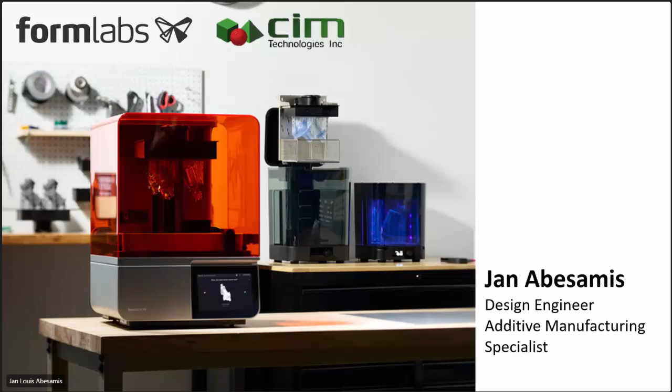So yan, kita naman na sir, no? Yes. So yan, so si Form 4, skip ko lang yung first two slides ko kasi we're all familiar what is 3D printing is.

So ito, si Form, sabi mo familiar ka kay Creality. FDM yung Creality niya sir o meron kayong Creality na SLA din? Yung regular lang na Creality, yung may filament. So Creality 3D printers you have is yung filament-based na 3D printer, it uses filament and hot extrusion.

In terms of AM, andun sila sa less precise and less accurate na printing. More on visual or tactile na object unless ma-calibrate mo siya to the point na makakuha ka ng accurate at precise na printouts. Pero with us, with Forms, nagfo-focus kami dito sa resin printing, photopolymerization.

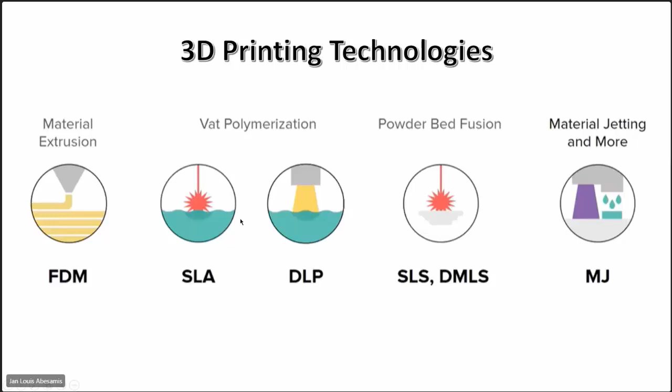So right now, si Form 4 is a technology advancement na combination nitong dalawa, SLA and DLP. Before kasi, si SLA, it uses single laser to form yung per layer niya. Then DLP, same way, like projector type, katulad ng mga projector na ginagamit natin sa presentation. Pero right now, si Form 4, it's a combination of two. Marami na siyang LED, tinatawag na siyang MSLA to create yung per layer niya. So much faster and much precise na yung printing.

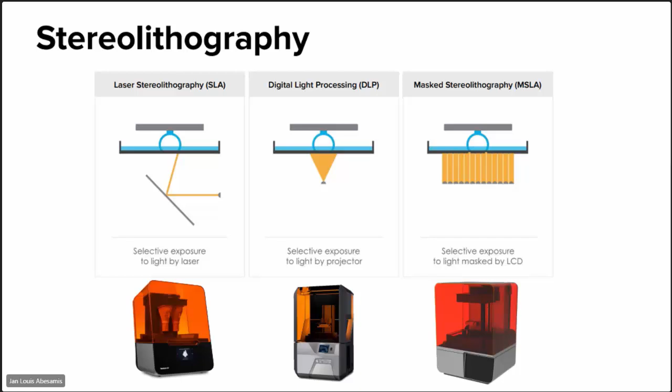So ang ginagawa namin right now with Formlabs at with other 3D printers, kasi ang nagiging marketing strategy ng other market, pag sinabi nilang high resolution, yung nag-research ka na, yung 12K, 8K na LCD, mas maganda, mas precise, which is not naman. It's a combination of two lagi, meron laging kaakibat siya. Pero in terms of TV, syempre, mas maganda yung 12K, 8K. Pero in 3D printing, hindi.

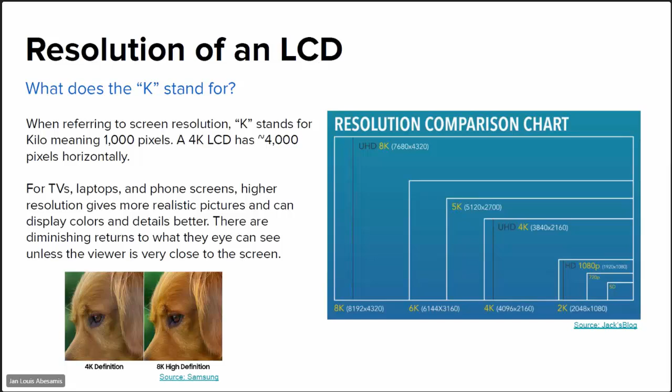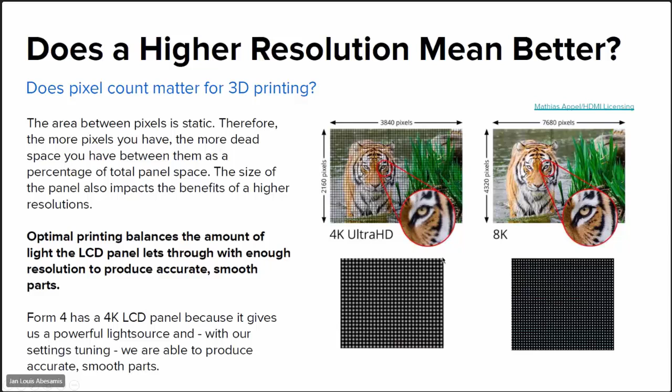Kailangan kabisado mo yung physical dimension din nung LCD na ginamit. For example, same dimension in XY, pero yung isa 8K, yung iba 4K. Kung mapapansin mo, in 8K, maraming block. Nakaka-affect yan dun sa magiging precision and accuracy ng printouts mo. So may expose yung layer mo. Unlike with a good combination of physical dimension and resolution, mas magpa-pass through yung ilaw, mas na-cure at mas na-expose yung resin para makakuha ka ng magandang printouts.

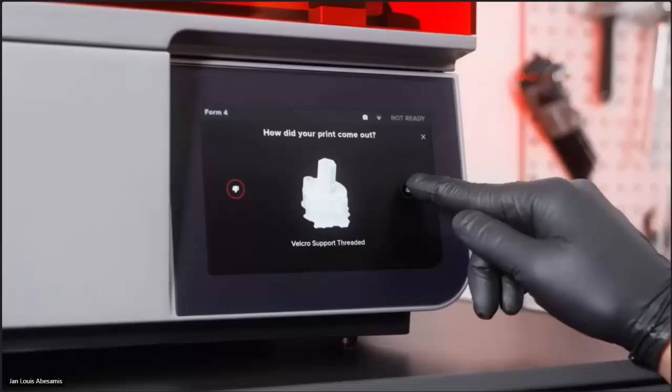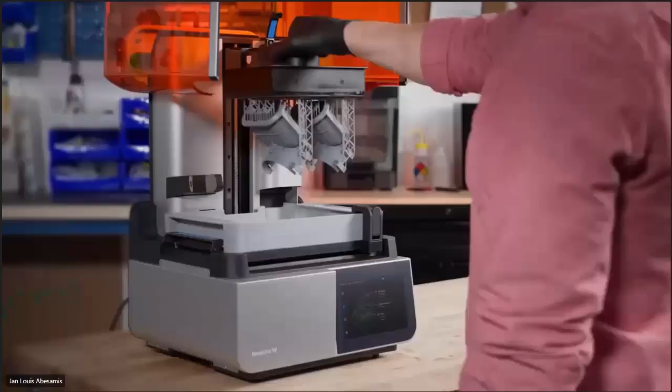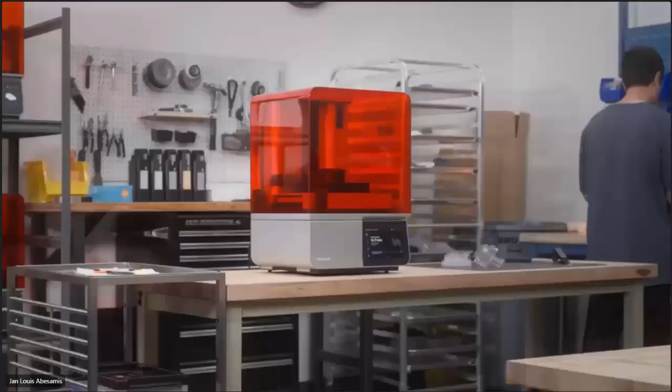Introducing Form 4. So fast, it will change the way you work, with most prints in under 2 hours. Iterate several times a day with a proprietary release texture, flexible film tank, and ultra-high optical power. Produce parts that always fit, rivaling injection molding with 50-micron pixels, advanced pixel smoothing, and light touch supports. Achieve an unmatched print success rate with validated print settings, precision heating, force sensing, debris detection, and remote monitoring. Tackle any problem with industry-leading materials, with an upgraded mixer and dispense system that support highly viscous and filled resins. And do it all with a workflow anyone can learn in 15 minutes, with instant material changes, comprehensive software, and automated post-processing. Enter a new era of performance, built on our next-generation low-force display print engine, featuring a high-power backlight unit, light processing unit 4, release texture, and a flexible film tank, delivering extreme speed, reliability, and print quality. Now, anyone can perfect their products, keep production running, or improve patient care. The tool you've been waiting for, Form 4.

So ito, yan yung innovation right now sa 3D printing. Dati kasi, pag sinabi mong 3D printing, probably na-experience mo na rin with Creality, pag magpi-print ka, it takes days, lalo na pag full build volume. So with Form 4, ang tina-target na ngayon ng mga 3D printing companies is faster printer for faster iteration.

So with Form 4, mostly kahit almost full build volume, yung mga printing times namin during testing, under 2 hours. Right now may piniprint akong full build volume, nasa 5 hours lang yung print niya. So rarely na yung case na umaabot ng days yung printing. Versatile, maraming materials kay Formlabs. Then si Form 4 is a plug-and-play printer siya.

At reliability rin, so with Form 4, yung printer natin is connected through Wi-Fi, tina-track namin ng Formlabs yung mga successful print niyo kasi chine-check yan kung how reliable na ba yung machine na nagawa namin. At in case nakahawak ka ng resin printed compared to FDM, mas smooth naman yung printing, less post-processing.

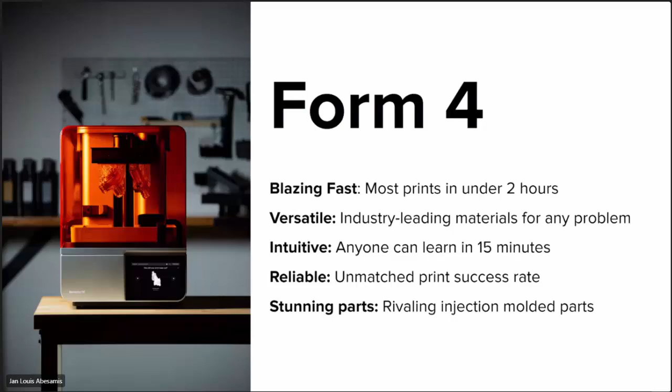So yan, in comparison with the predecessors, assuming 8 hours per day yung working hours, comparing dun kay Form 2 and Form 3+, with ang max build volume, roughly whole day, 4 na parts lang. With Form 4, nakakadalawang salang tayo sa kanya, at nakakapag-print tayo ng 12 na parts. So ganun na siya kabilis.

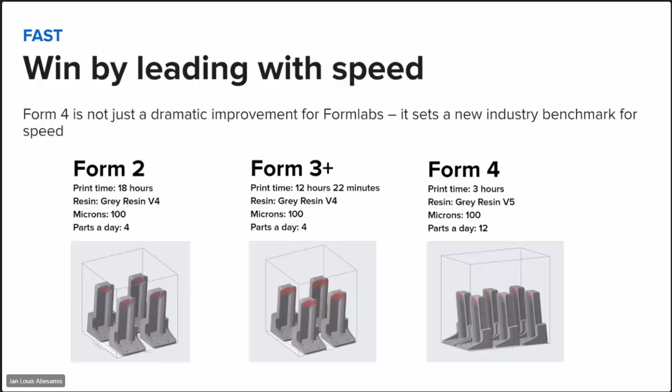In our case, in R&D, makakapag-iterate tayo. For example, may dinesign tayo nung umaga, print natin after that, then may nakita yung checker natin, paki-reiterate and redesign. So pwede ka agad, makakapag-print tayo agad. So mas mabilis.

So, this is the printing process. Per layer, there's a tank where the resin is. It's done layer by layer—that's the key term for 3D printing.

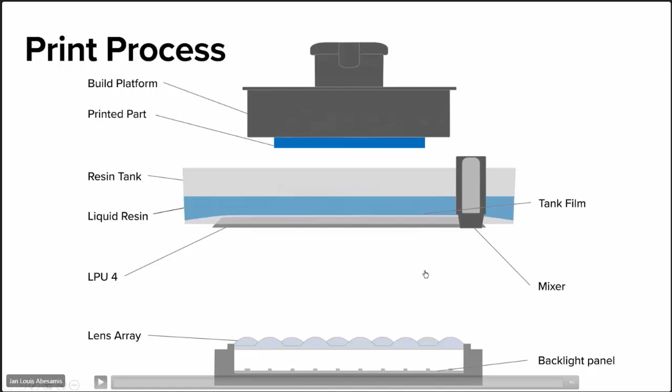It's maximized so that the whole resin film tank is more illuminated, especially when printing multiple parts or one build volume—unlike earlier SLA which used one laser that had movement. So that's how the printing works, then it solidifies after light is projected from underneath the printer.

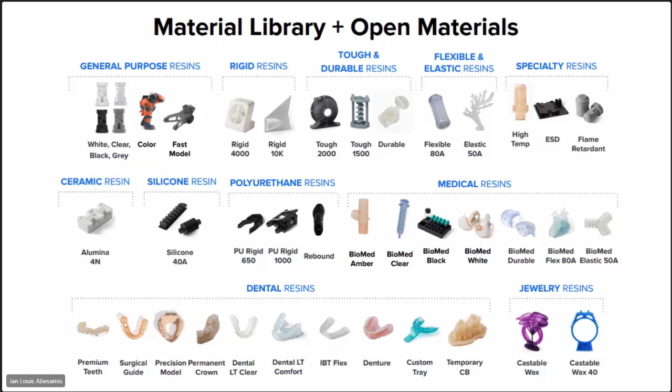With SLA, it's cleaner and crisper. The printout is almost injection finish, and you can print anywhere since it's connected to Wi-Fi—just set up your printer at home, then you can upload and print.

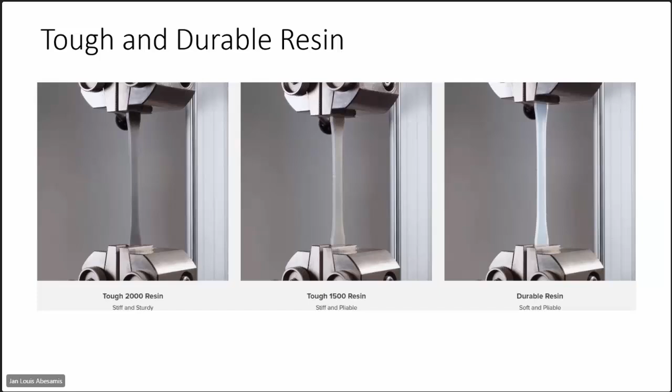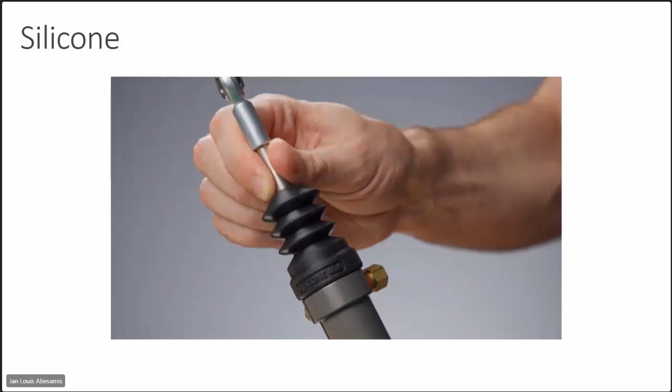Then there's elastic and flexible. Flexible is for soft compounds, almost like a hand grip. Elastic is almost like a silicone material—before, that was the closest material to silicone, but lately Formlabs created a 3D printing material that's as soft as actual silicone. If you're familiar with Shore Hardness, this material is Shore Hardness 40A.

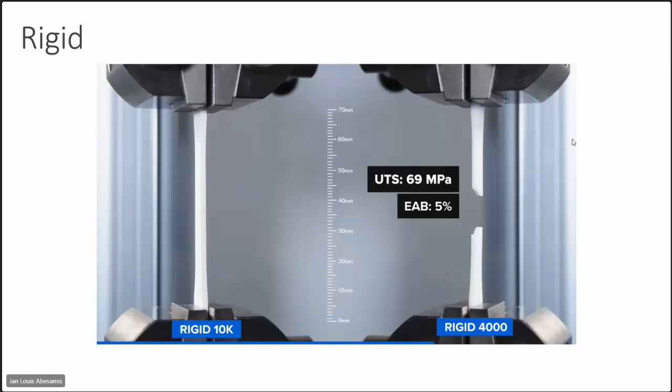In case you need a very hard or very durable material, what we have here is Rigid, and this material is chemically resistant—it breaks during elongation stress.

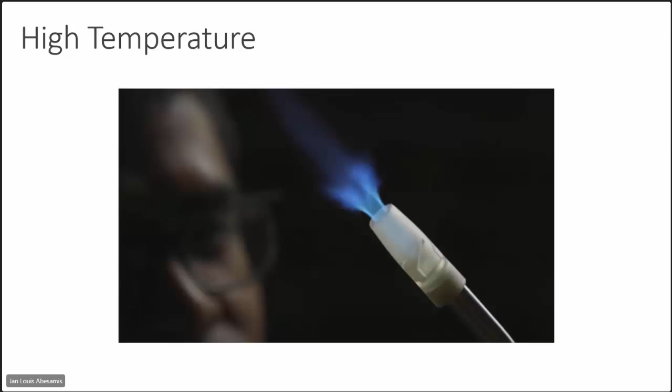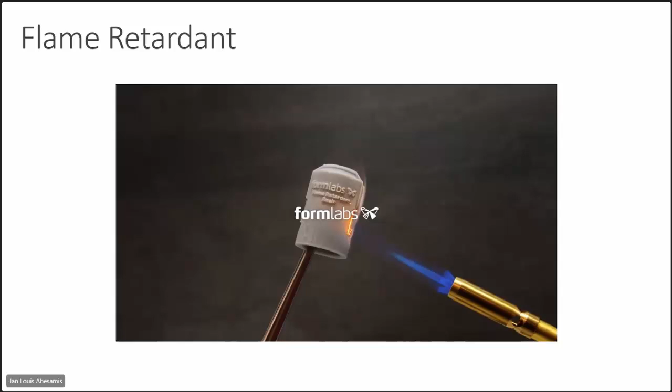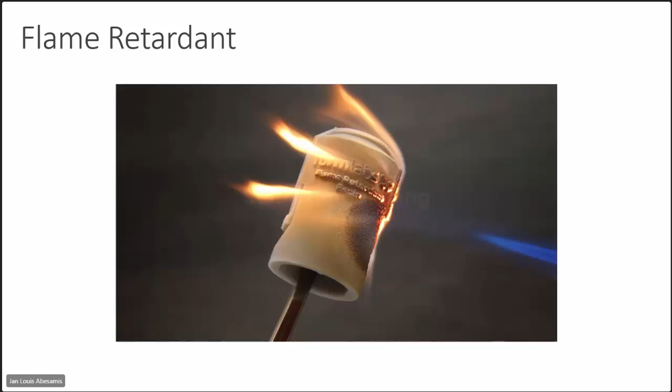Next, there's also high temperature. That material can withstand around 236 degrees Celsius, for applications like needing an enclosure that won't burn. You need to enclose your electronic component or PCB with a flame retardant material in case the location is more susceptible to fire—the material will self-extinguish.

Then there's ESD—if it's susceptible to electrostatic discharge, we have an ESD safe material to protect the components.

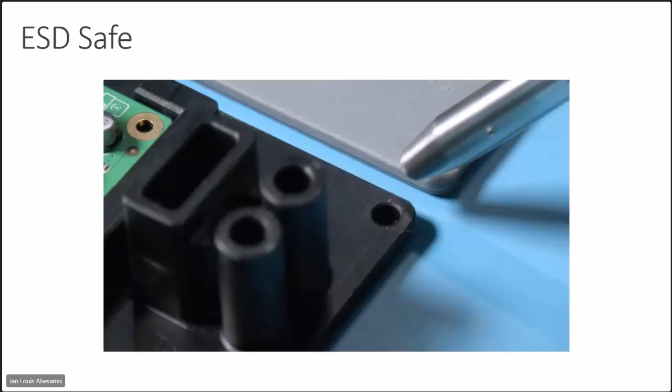Our materials are named depending on the application. Probably many of us engineers are used to chemical names or traditional plastics like PP, ABS, or in 3D printing filament, PLA—that's what we're used to. Those plastics have counterparts in resin material with Formlabs, so no need to memorize them. Once you acquire your printer, just tell us the application and we'll suggest resins for you.

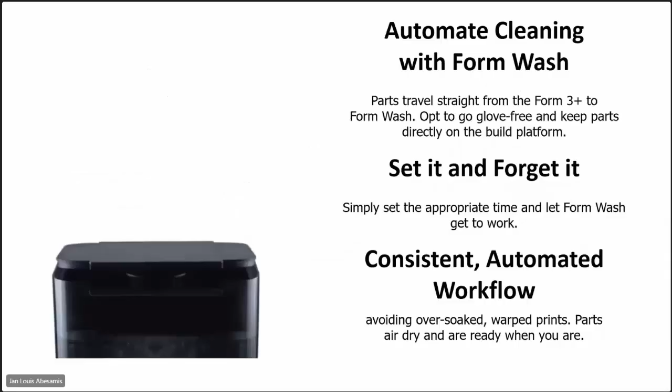The difference is in post-processing. In FDM or filament-based printers, we just cut off the supports. In SLA, there are two steps: washing and curing. During printing, the model is submerged in resin, so after printing there's excess resin stuck on your printout model—we need to wash it off. Washing is just using IPA, isopropyl alcohol 99%, to remove the excess resin and stickiness from your printouts.

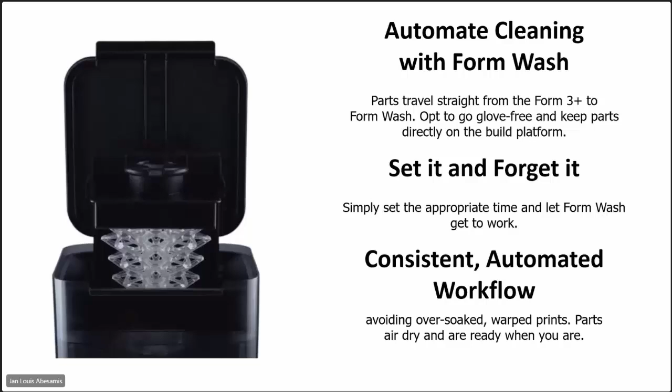After that, especially for engineering resin—if you don't cure the engineering or dental resin, its performance won't show. For example, we printed using high temp resin that can withstand 236 degrees Celsius; if you don't cure it, it won't reach that 236 degrees Celsius—it'll be like printing a normal resin material.

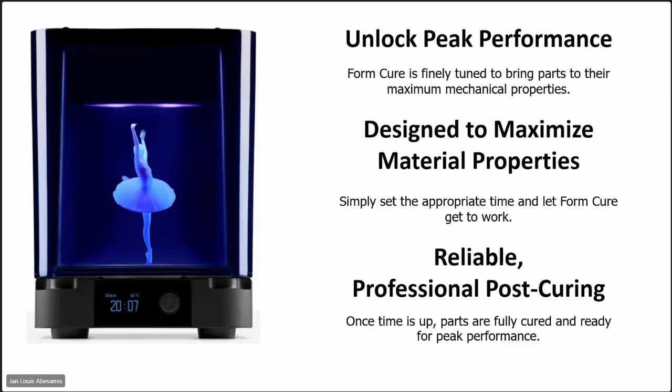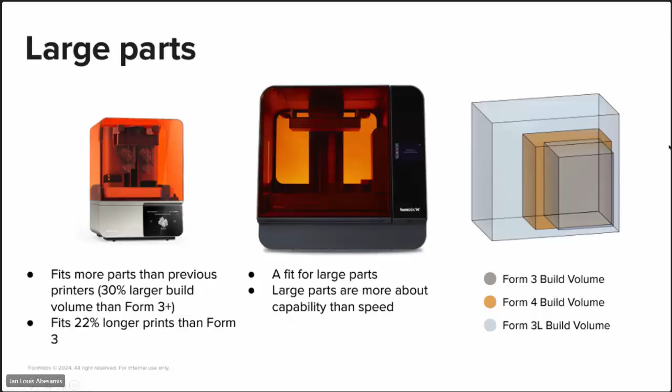To give you an idea, as we say, if you have access to us, to the product developer, product designer—once we have access with the 3D printer, imagination is the only limit. We can design tools using our printer, or we can prototype.